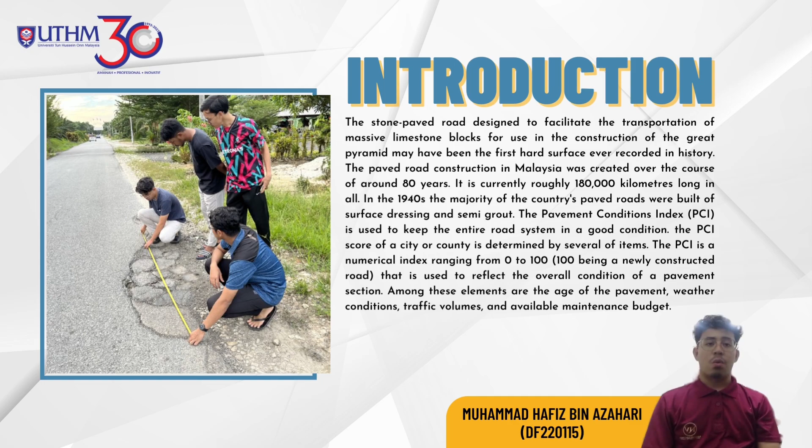The Pavement Condition Index, or we call it PCI, is used to keep the entire road system in good condition. The PCI score of a city or county is determined by several items. The PCI is a numerical index ranging from 0 to 100. It is used to reflect the overall condition of the pavement section. Among the elements are the age of the pavement, weather conditions, traffic volume, and available maintenance.

Next, the objective of this study is, first, to justify the selection of the road that fits the criteria for the PCI study. Second, to perform the pavement condition index PCI test on the road selected and analyze the data obtained. And third, to recommend a maintenance or rehabilitation method needed to improve the PCI on the road being studied.

Next, the importance of the study. The assignment of the maintenance strategy for the current pavement has typically been done using a variety of indicators such as the Pavement Condition Index (PCI). A pavement section's PCI history can be used to determine how quickly it is deteriorating, as well as any potential substantial restoration requirements in order to prioritize, fund, and carry out maintenance and rehabilitation on the pavement segment.

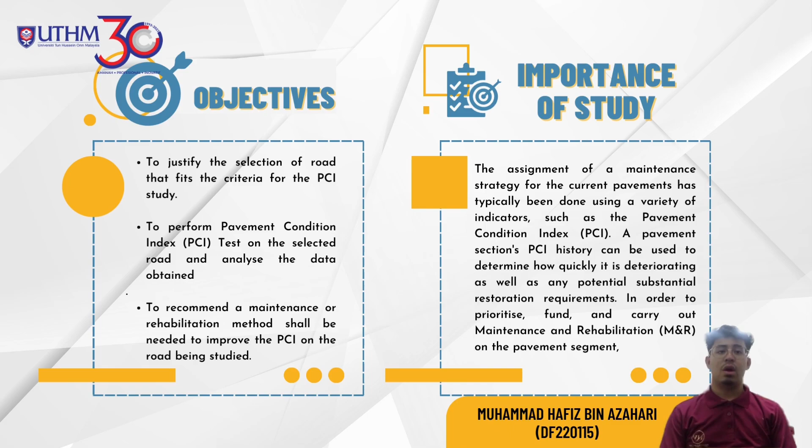I will present the literature review of this project. The Pavement Condition Index (PCI) provides a picture of a road's pavement health. It is scaled from 0 to 100, and several factors influence a city's or county's PCI score. These include pavement age, climate and precipitation, traffic loads, and maintenance funds availability.

PCI is a system for measuring road pavement condition by type and extent of damage, and can be used as a reference in the maintenance business. The PCI approach offers information on pavement conditions only at the time of the survey and cannot anticipate future conditions. However, by conducting condition surveys on a regular basis, information on pavement condition can be utilized to predict future performance as well as a more complete measurement input.

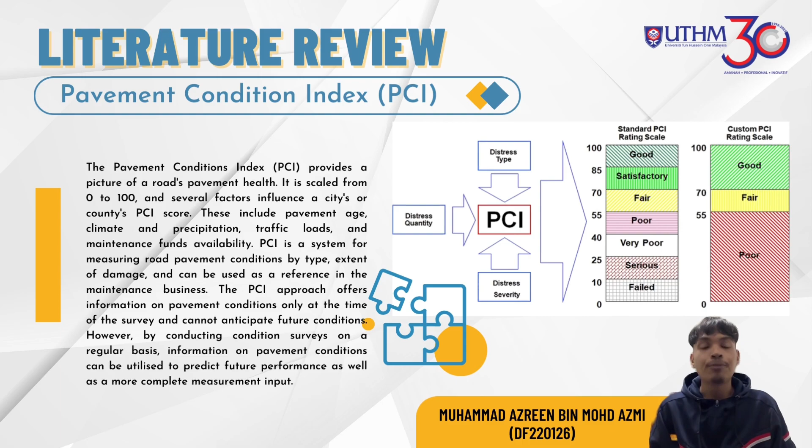Next, types of pavement distress. Firstly, cracking. Cracks in bituminous pavement are caused by surface deflection over an unstable foundation, surface shrinkage, surface thermal expansion and contraction, poorly designed lane junctions, or reflection cracking.

Secondly, longitudinal and transverse cracks. Shrinkage or contraction of the bituminous concrete surface frequently causes longitudinal and transverse cracks. Surface material shrinkage is induced by oxidation and age hardening of the asphalt material. Thermal variations produce contraction, and poorly designed lane joints may hasten the formation of longitudinal cracks.

Thirdly, alligator and fatigue cracking. Interconnected fractures that produce a succession of tiny blocks resembling alligator skin are referred to as alligator cracks. They can be caused by bituminous surface fatigue failure under repeated loads or by excessive bending of the asphalt surface over a deficient or inadequately built foundation. Water saturation of the base or subgrade is frequently the cause of decreased support.

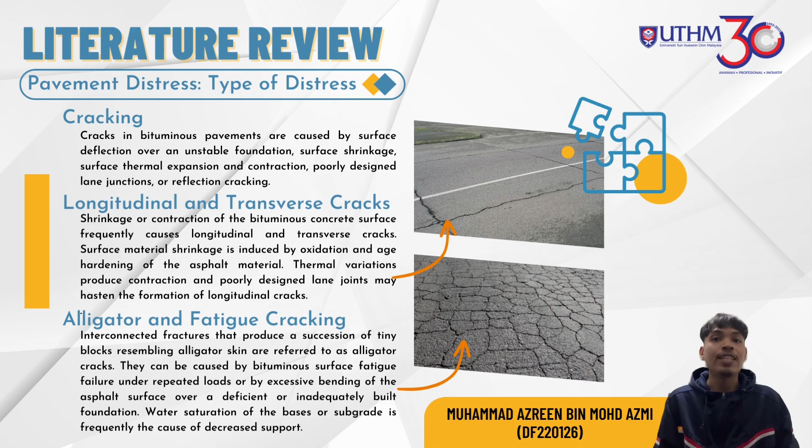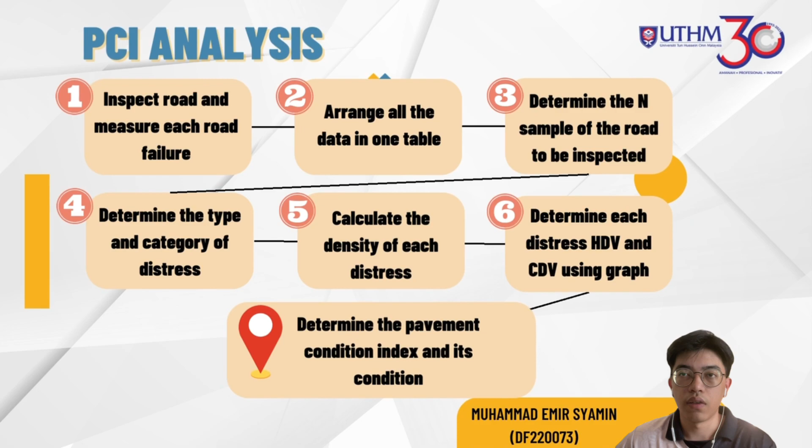Today I will be presenting the PCI analysis. Firstly, we need to inspect the road and measure each road failure. Next, we need to arrange all the data in one table. Third, determine the sample of the road to be inspected. Next, determine the type and category of the distress. Next, calculate the density of each distress. After that, determine each distress's HDV and CDV using the graphs provided. Lastly, determine the pavement condition index and its condition.

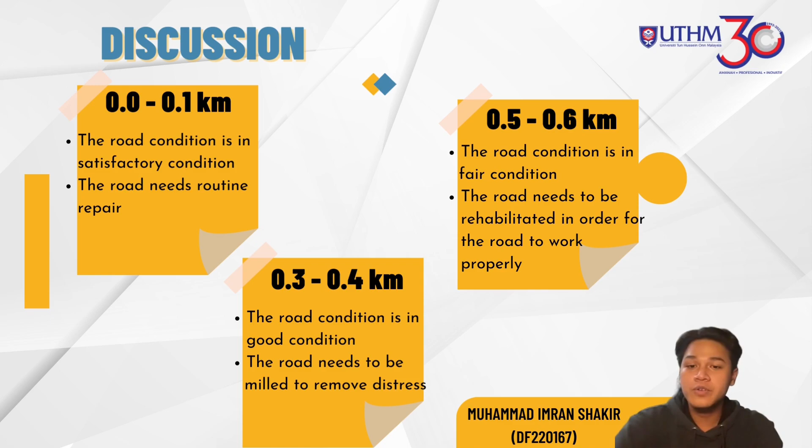From 0.0 to 0.1 km, we have found that the road is in satisfactory condition, so the road needs routine repair to maintain the condition. The next one is 0.3 to 0.4 km, where the road is in good condition. Therefore, the road needs to be milled to remove any distress. Next one is 0.5 to 0.6 km, where the road is in fair condition. Therefore, the road needs to be rehabilitated in order for the road to work properly.

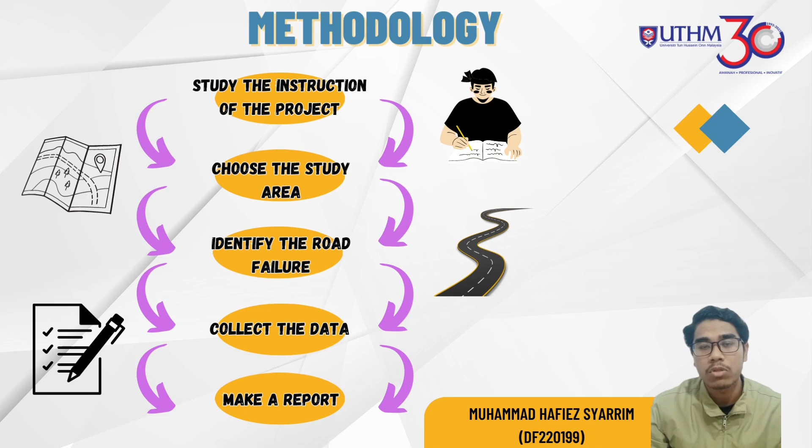In this chapter, we will go over the importance of analyzing the data collected from each monitored road segment and offer useful suggestions for maintaining the road. Students may also utilize the PCI form more efficiently and learn to document the damage by starting a research project in the development of this road to increase their understanding of analyzing road flaws. After being able to do some data analysis, we chose to maintain the entire piece.

Additionally, the kind of road maintenance was completed and submitted to the authorities for approval of the road repair procedure. Then, to protect the safety and comfort of road users, Malaysian authorities must respond seriously whenever road damage happens. It is important for researchers to create roads with high strength for long-term usage and navigation. And to keep the road in good shape, we need to conduct routine road data gathering operations.

Malaysian road authorities also must integrate technology from other industrialized nations to increase user efficiency while also enhancing their present design and maintenance technology to provide more environmentally friendly design.